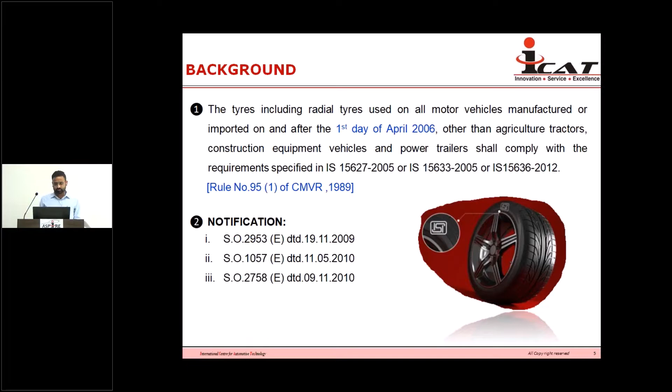Moving to the next screen, about AIS 142. This standard was finalized in 2019, and I was lucky enough to get an opportunity to work closely on formulation of the AIS 142 regulation with various stakeholders.

In this standard, we are covering three categories of tires, that is C1, C2, C3. I will discuss the definition of C1, C2, C3 in the next screen. This standard does not apply to two-wheeler tires.

In AIS 142, there are three test requirements to qualify the tire under this regulation. One is rolling sound emission test, rolling resistance test, and wet grip test. I have also mentioned the tires which are not covered under this regulation.

I would also like to highlight here, AIS 142 is also the base standard for testing, which will be used for the tire star labeling program, which is an upcoming regulation in India. As per our awareness, it is going to be notified in voluntary phase in the next 1 or 2 months.

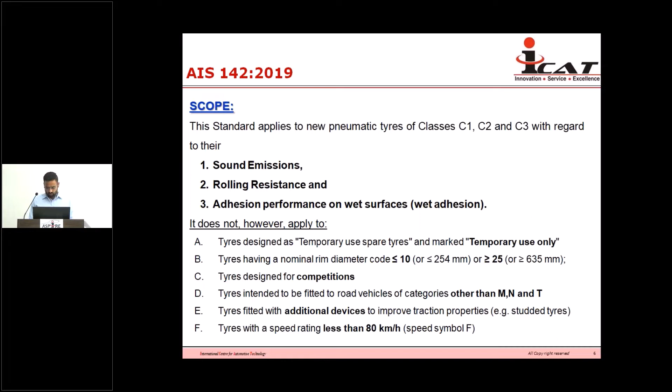Tire classes, just for information: C1 we call passenger car tires, and they conform to the whole requirement of IS 15633, or we can say ECR 30. C2 tires are single formation tires which conform to IS 15636, but load index should be 121 or less, and speed category should be more than N symbol, and should be marked with LT or C.

Moving to C3 category tire: single formation tire conforming to standard 15636, the tire should have load index marked more than 122, and tire shall not be marked with LT or C. In the second case, load index could be less than 121 and speed category less than or equal to M, and there should not be LT or C marking on the tire sidewall, so the tire will fall in C3 category.

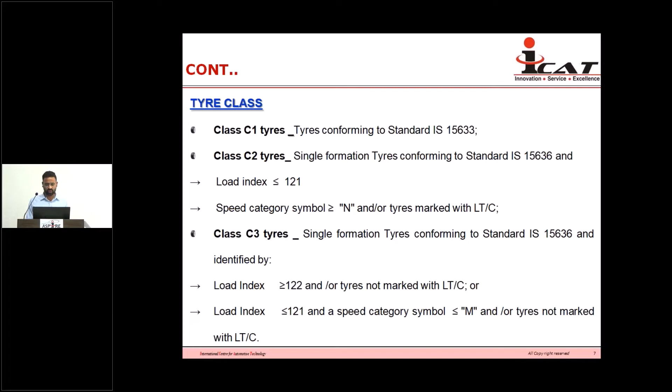Moving to next screen, this is the type approval procedure, clearly mentioned in AIS 142. I would also like to highlight that in AIS 142 there is a worst case criteria for type approval. As per my awareness, in ECR 117, since this standard is quite aligned with ECR 117, there is no worst case criteria for type approval.

For defining worst case criteria, if tires fall in the same range, what parameter must be common if we are going to define worst case criteria? Detail is already mentioned in AIS 142. I am just capturing brief points like manufacturer, category of use, and structure - this should not be changed, then you can apply worst case criteria.

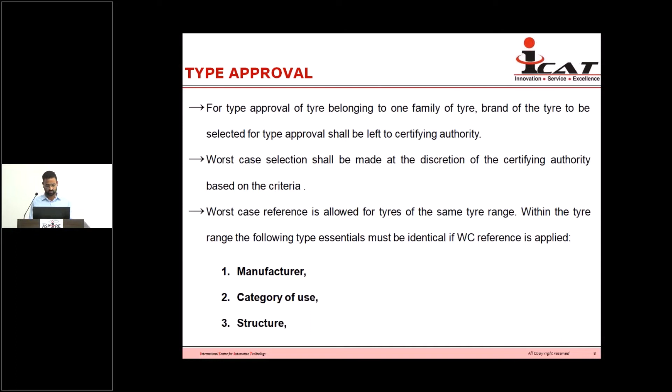Now, as I am presenting for indoor testing facility, rolling resistance is one of the most important tests for this standard. There are 4 kinds of methods for evaluation of rolling resistance from the tire. We have the torque method test facility to measure rolling resistance, and 2 separate machines to measure the whole range of tire CRR value - one for C1, C2, and the second for C3 category. These 2 facilities we have been running for the last 2 years.

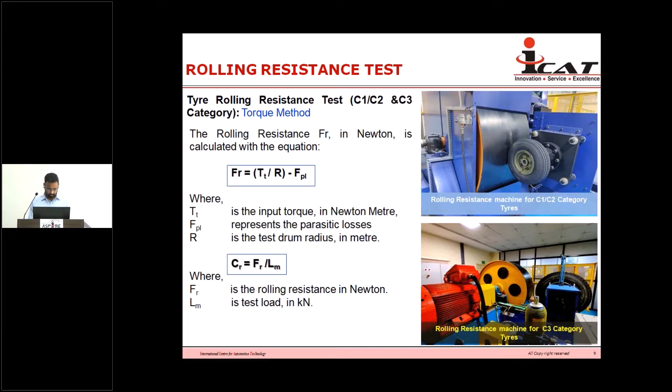Now moving to next slide, I am depicting here how we can define worst case criteria if load index is same for any tire. If tire is standard and reinforced but load index is same, then a standard tire will give the worst RRC value. So to qualify worst case criteria, you have to submit a standard tire if both tires have the same load index.

Same for run flat and standard tire - if tire is run flat and standard, then you have to give a run flat tire which has the same load index. Details are already mentioned in AIS 142.

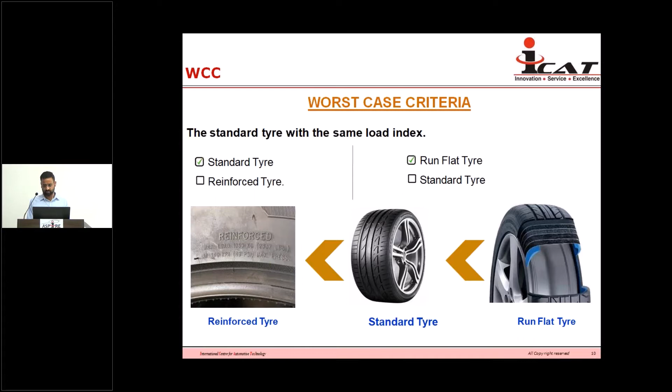Moving to next screen. In AIS 142, there are 3 stages of RRC values in order to qualify the test. One is stage 1, and there is one point I would like to highlight: in AIS 142 we are covering bias and radial both, while in other international standards bias is not covered, because in India we still have a good portion of tires that are bias. So we are also addressing bias tires, and also we have 12 inch tires - this is also taken care of in this standard.

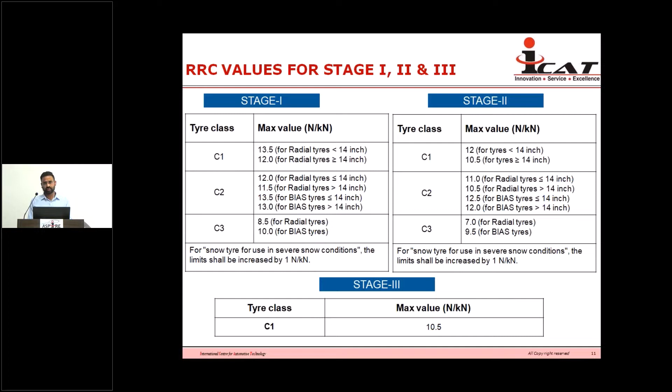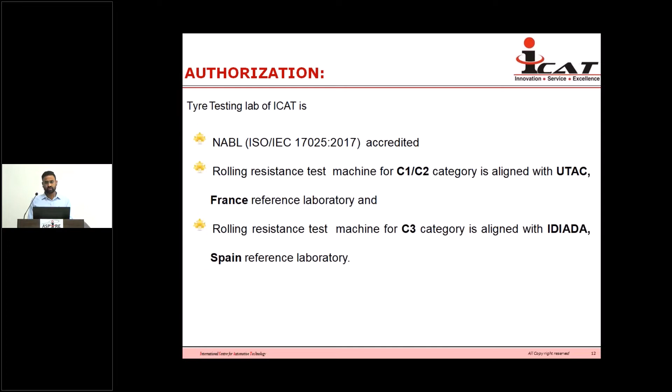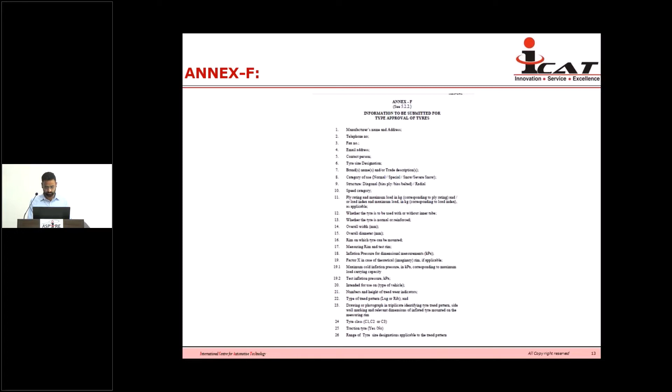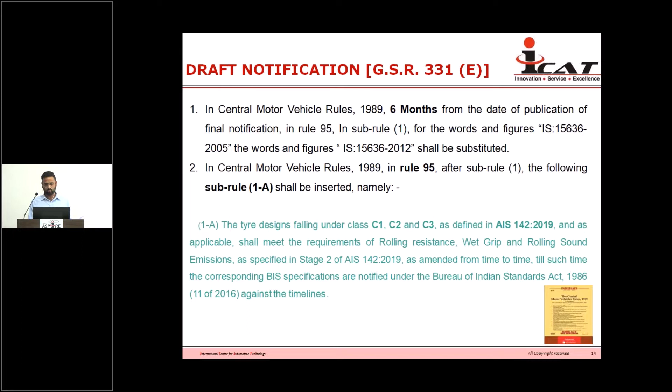So we are not going for stage 1, we are directly moving to stage 2, and any kind of comment on this regulation or draft notification - Ministry of Road Transport has already asked for comments from respective stakeholders. In case there is any big issue related to implementation or regulation, this will be implemented 6 months after this draft notification publication date. I would like to share the timelines proposed by the government for new tire designs - it would be applicable from October 2021, and for existing tire designs it would be applicable from 1st October 2022.

Regarding the new design of tire, we received many feedbacks from industry as well as technical experts. In our view, one of the most suited definitions could be—although the ministry has already asked for a suitable definition from stakeholders like test agencies, tire associations, and technical experts—that any tire produced after October 21 and eligible for BIS certification can be treated as a new design. However, the definition of new tire design is debatable and feedback is invited by the regulatory or notifying authority.

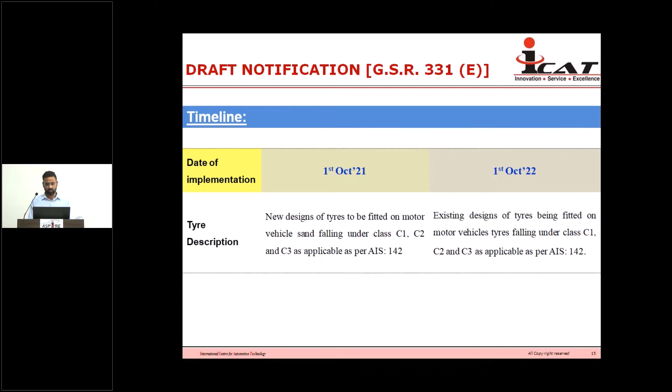So if from your side you have any views on new tire design, you can post them in the chat box. We will see, and if any further clarification is required, we will revert on that. So thank you, this is from my side.

Now over to Mr. Abhishek Kumar for wet grip and rolling sound emissions detail. Thank you.

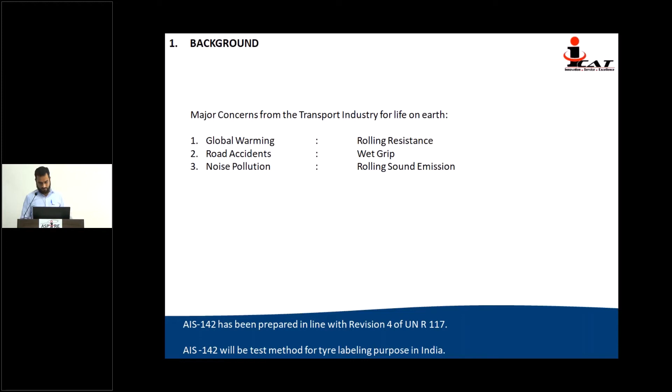The major concerns are global warming, which I already talked about, and road accidents. We have a decade of safety from 2011 to 2020, and again global targets for reduction in road accidents. Then noise pollution, which is important for our health. Now we will discuss these in detail.

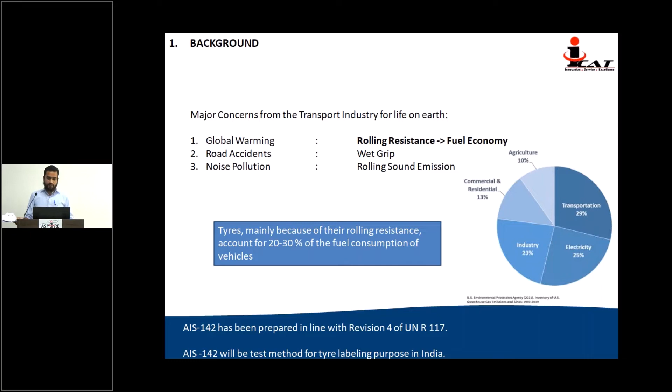Rolling resistance is directly linked to fuel economy, as Siddharth talked about. If you see this pie chart, transportation contributes to 29% of greenhouse gas emissions, and rolling resistance can play an important part in reducing these things, and hence global warming.

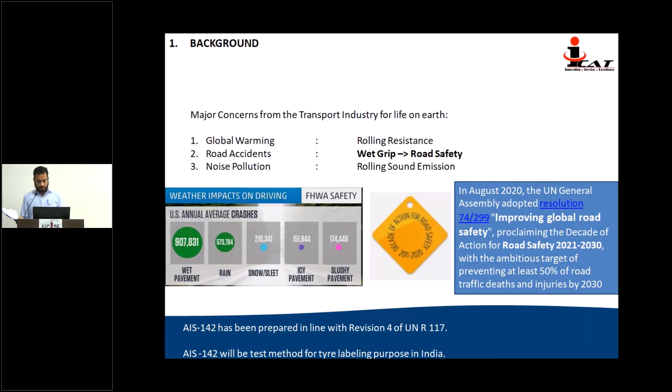This is US data. Unfortunately, we don't have much data in India.

Then rolling sound emission, which is the third part of this standard. Traffic noise, as you are all aware, is a nuisance. It affects our mental as well as physical health - blood pressure, sleep disturbances, behavior, immune system, aggression, etc. This sound emission comes from engine as well as tire and tailpipe emission, so in this standard we are targeting tire road noise.

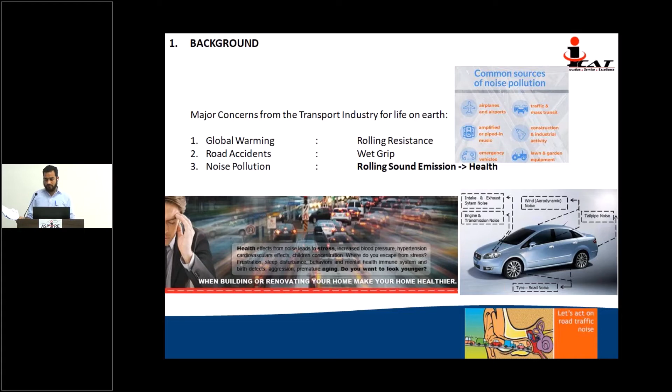So for improving all these things, there were labelings. The US adopted only UTQGS ratings, which you can see on the right side - tread wear, traction, temperature - written on most tires. Now Europe as well as India will in future have labels like this, which will cover rolling resistance, wet grip, and rolling sound emission. This is all for consumer awareness, so they purchase with an informed choice.

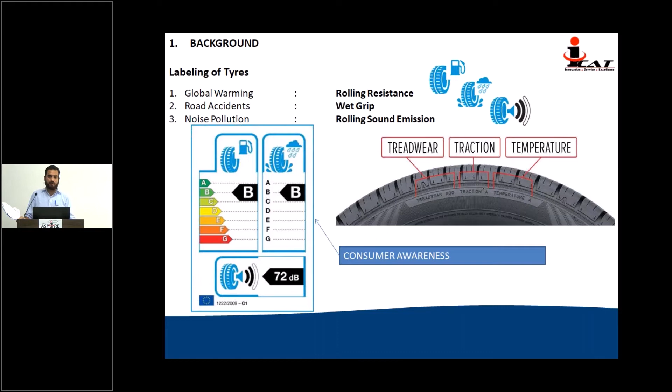As we talked about, these parameters are very much interlinked. Improving rolling resistance may affect wet grip. So the tire industry is doing its bit to bring tires which have reduced rolling resistance and improved wet braking. All these parameters have to live together and have a sound sleep, like you can see on this pillow.

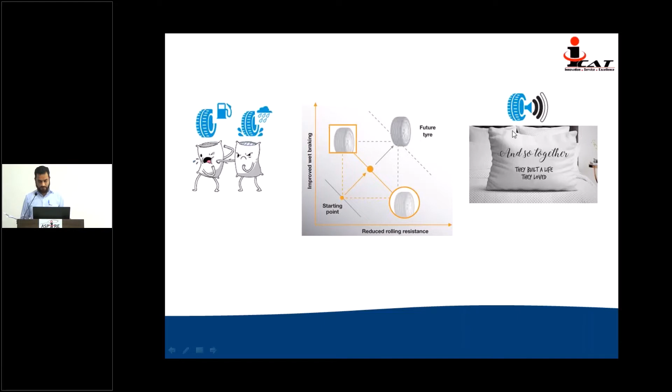Tire classification - broad tire classification has been told by Siddharth. So C1, C2, C3, and their respective European as well as Indian standards I have mentioned here. Now C3 tires are divided further into two more families, wide family and narrow family, depending upon their section width, with 285mm as the demarcation line.

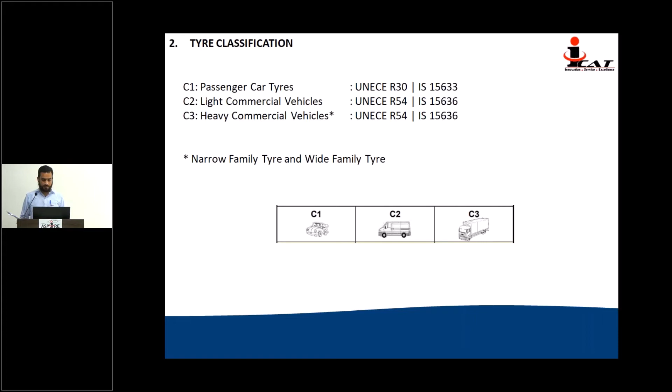Now wet grip testing - we will talk about what facilities and how we are doing it. This is the aerial overview of our ICAT track at Center 2, Manesar. We have an ABS track, and on the left of the ABS track, we have this track meant for wet grip testing.

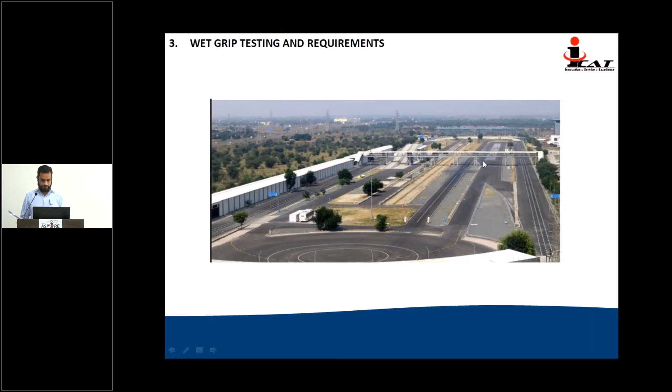Track requirements have a slight difference for C1 and C2, C3 tires, related to British pendulum number - 42 to 60 for C1, and 40 to 60 for C2, C3 tires. Or if measuring with the trailer method, which is PBFC, peak braking force coefficient, it is 0.7 plus or minus 0.1. Other criteria are gradient, maximum chipping size, and texture depth - I have mentioned all these. These are the track requirements on which wet grip testing is to be performed.

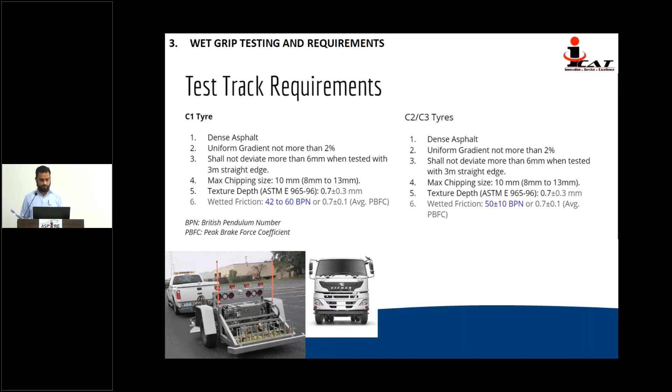Here we have standard reference test tires. Unlike rolling resistance, where the tire is put to test directly on the machine with some interlab correlations, here we have a standard reference test tire, and the candidate tire from companies is to be checked against it.

There are 4 types of standard reference test tires. We have 14-inch, which is used currently although it is not under production now - it was used for track certification. Then we have 16-inch tire, used for wet grip testing of C1 tires. Then 16C, for C2 tires. And then 19.5, for the narrow family of C3 tires, and 22.5-inch tire for the wider family of C3 tires.

These tires are kept in controlled conditions as mentioned in the standard. The sequence for testing is: first the SRTT is tested and its performance checked, then we check performance for the candidate tire, and then again come back to SRTT. In between we can test a maximum of 3 tires, and depending upon those we have different weightage formulas to calculate the wet grip index. Other important things for wet grip testing are tire conditioning, track conditioning, tire burnishing, and finally testing and the report.

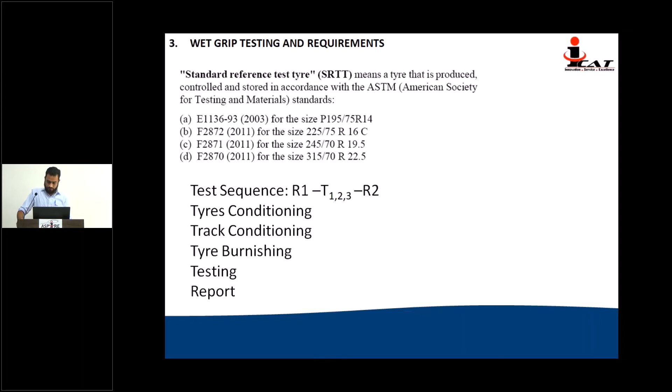Tire conditioning: tires have to be kept for 2 hours adjacent to the test track, such that it is stabilized at the ambient temperature of the test track area. This is a must requirement, although it has been found that it is still a very narrow approach for conditioning—minimum of 2 hours. So it is good to have tire conditioning done for maybe more than 2 hours.

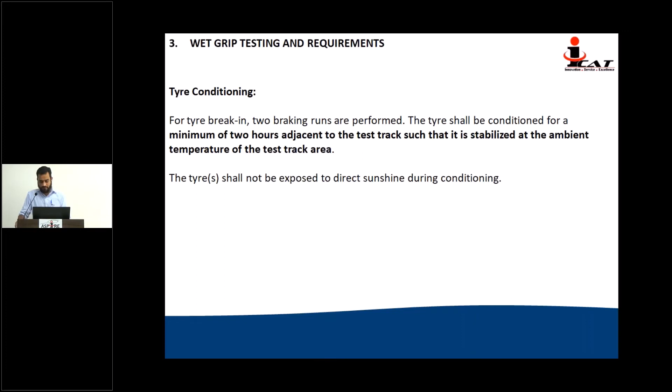This tire conditioning applies for wet grip testing in both methods, trailer and vehicle method, which I will talk about in subsequent slides. Track conditioning: vehicle method has a different way of track conditioning, and trailer method has a separate methodology for track conditioning.

For vehicle method, the track has to be watered half an hour prior to testing. If it is not done, you may expect a huge variation in test results, so this is a very important aspect of testing. Additionally, maintaining the water film thickness, which is 1.0 mm plus minus 0.5 mm from the peak of pavement. Then ultimately it has to be conditioned with a tire which is not meant for testing, at a speed of 90 km per hour.

This is for vehicle method C1 tire. For C2 tire in vehicle method, it is done at a speed of 50 km per hour. Now trailer method has again different speeds: for C1 tire it is 65 plus minus 2 km per hour, and for C2/C3 tire it is 50 km per hour, with the tire not involved in testing. So you have to change the tire on the vehicle or trailer after doing this track conditioning, and get back to testing within a given time frame.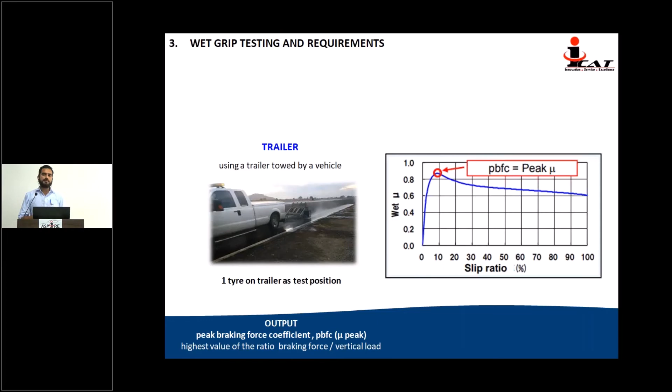So you have two methods to perform wet grip index testing as of now in Europe as well as in India. The trailer method is the peak braking coefficient measurement method: you lock one of the test position tires—there is one tire on the trailer as test position, on the left side of the trailer in this picture. This tire is braked while the whole system keeps moving at a certain speed, here 65 km per hour with some tolerances, and we record continuous data of load and traction. As per standard, this data is generated, and with some averaging techniques, we get the peak mu value. The ratio of this peak mu for reference tire and candidate tire is basically the wet grip index, with some temperature corrections for C1 tires, but not for C2/C3 tires.

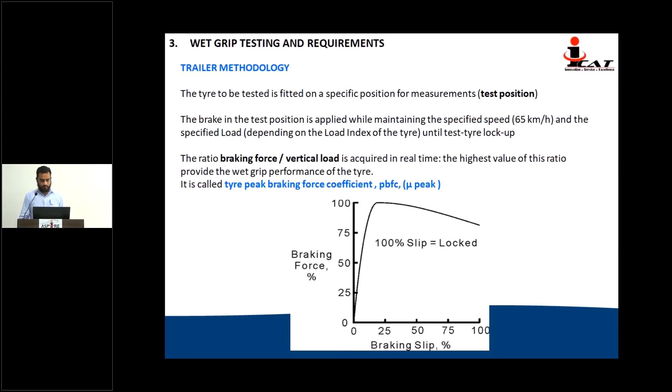Vehicle method is the same as I have already talked about. In this, you measure average deceleration, the distance covered by the vehicle from a certain speed to a certain speed—80 to 20 in this case—and measuring average deceleration, dividing it by G, you get a brake force coefficient, and the ratio of these is wet grip index.

These methods, if you look at them, seem simple, but when testing from a 12-inch tire to a 22.5-inch tire, or maybe more in the future, there are many challenges thrown at us. As it is said, the devil is in the details.

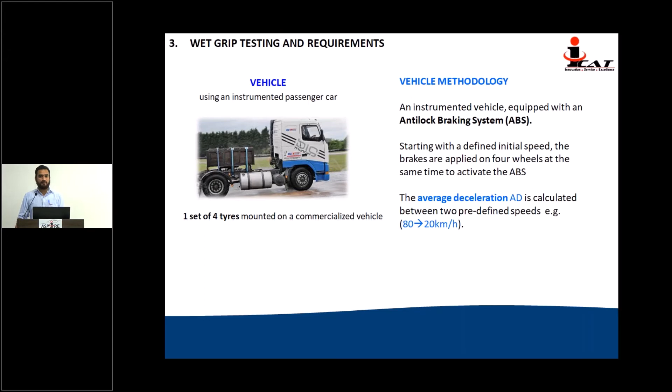There is also a bridge method for the vehicle method of wet grip testing, used when a vehicle is not suitable because the two tires to be tested—SRTT and candidate—are of very different sizes. Suppose a 12-inch tire is the candidate tire, and the SRTT is 16-inch; it is very difficult to test with the vehicle method, so it is usually tested with the trailer method. In the vehicle method, you have to use a control vehicle and a control tire to conduct this test, which is the bridge method.

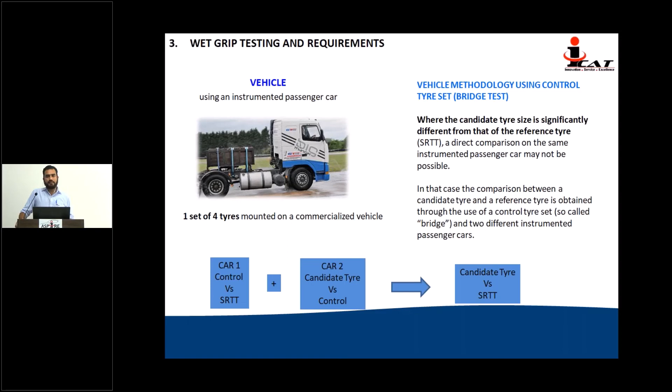Unfortunately, recently this test is under scrutiny and question because it induces a lot of variation in test results. In the latest developments in the European Union, there is a group WG21. They state that this should be avoided, and extreme tire sizes are to be tested on trailer.

This is some calculation using the trailer method and vehicle method. In the trailer method, mu is force by your load, and you get the value of PBC. Similarly, BFC, braking force coefficient, is obtained by your vehicle method. So it is simple, nothing much to talk about on this.

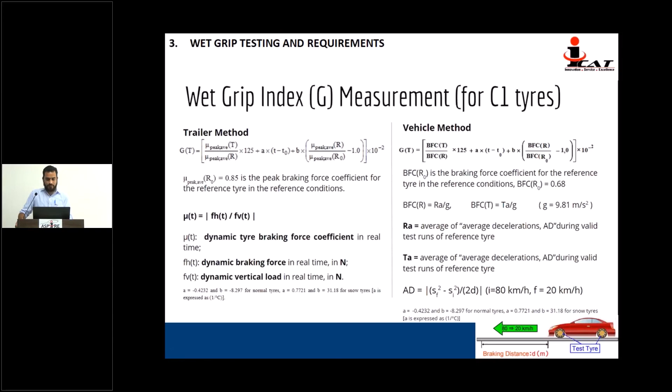This is for C1 tire and for C2, C3 tire. An important difference here is that for C1 tire there is a temperature correction present in both cases, but in C2, C3 tire there is no temperature correction.

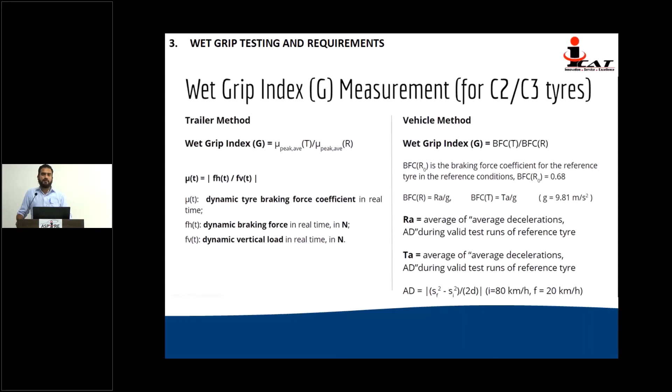Additionally, I forgot to mention a few other points. The typology of tires varies very much, from M+S tire to snow tire, all weather tire, severe snow tire, and professional tire, as well as bias ply tire. All these have a different set of performance under these test conditions. So some studies are going on to minimize this variation and get a value which is uniform throughout different testing agencies or partners where tests are conducted.

As per their statement, when wet grip index was first developed as a trailer and vehicle test method, there was good repeatability, but under the same test conditions. However, with time and different typology of tire, this has changed, and reproducibility of wet grip index has not been achieved as wanted.

In other words, this happens when there is a different set of testing conditions within the allowed range. For example, right now it is 5 degrees Celsius to 35 degrees Celsius, so there is a wide range of testing conditions. Similarly, for track there is a wide range of track certification, from 0.6 PBC to 0.8 PBC value, and with the British pendulum tester, there is a range from 40 to 60. So there is a huge variation in the parameters which influence the index value, and this brings issues of reproducibility in the test results.

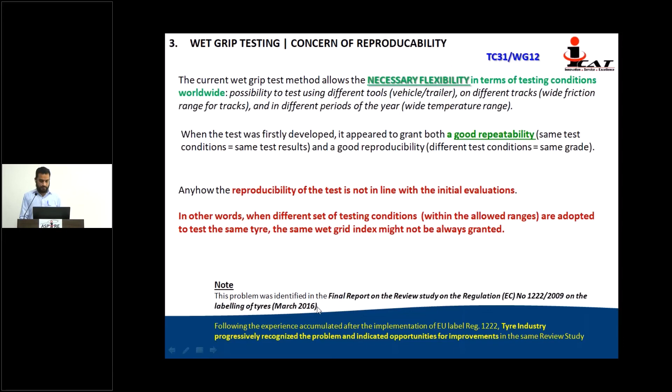So what was found? This is some additional information I'm sharing with you. The main sources of variability of the test method are listed here: these are methodology, trailer and vehicle, which give different test results, and then conditioning of the tire, which is also a major concern.

Wet track, track friction property and temperature are also variables, and tire typology and the corresponding correction equation is also a concern. Right now there is only one formula for correction covering all types of tires.

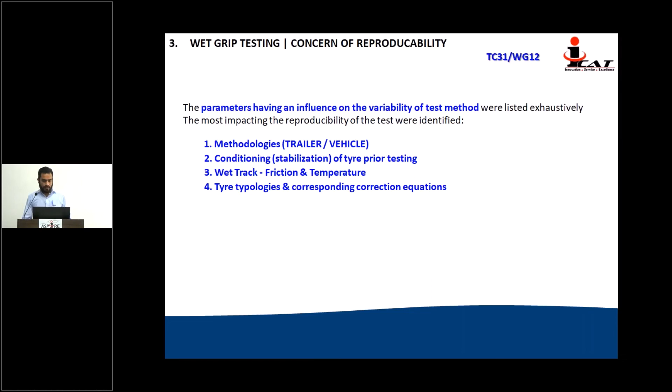Here they have given this example: there is a summer tire, all season tire, a 3PMSF tire, and winter tire. They are all used in different conditions in different parts of the world, so each tire behaves differently, or is designed to behave differently, under different test conditions. Equations need to be found through exhaustive and extensive testing to bring all these under the same frame and similar results.

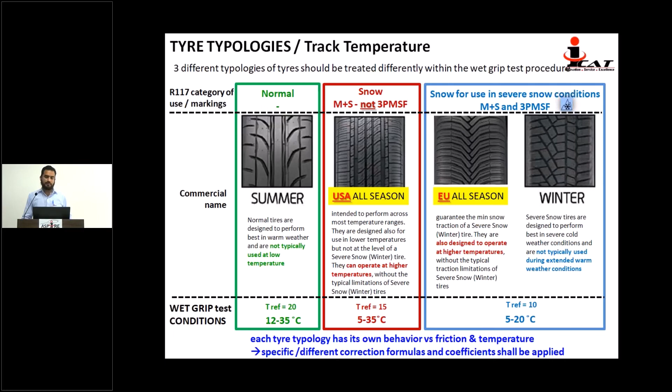So this was all about the rolling wet grip index. This is rolling sound emission. Rolling sound emission is not very different from the pass by noise test which vehicle manufacturers perform.

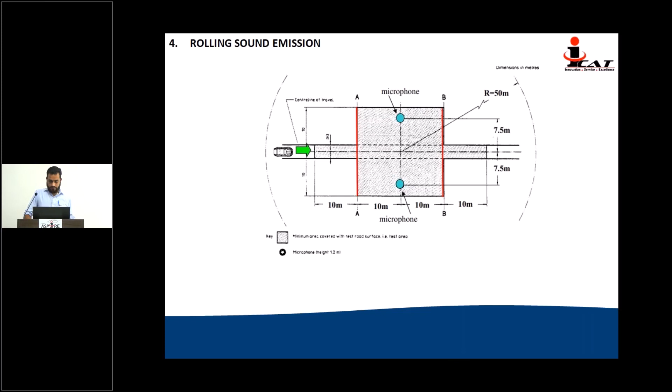This is the track for the rolling sound emission test, which is the same as the ISO 10844:2014 requirement. This is required by AIS 142 as well as AIS 117. Here, track was a source of variation; now the track approval process has become much more stringent, and there are certain conditions which must be met for the track.

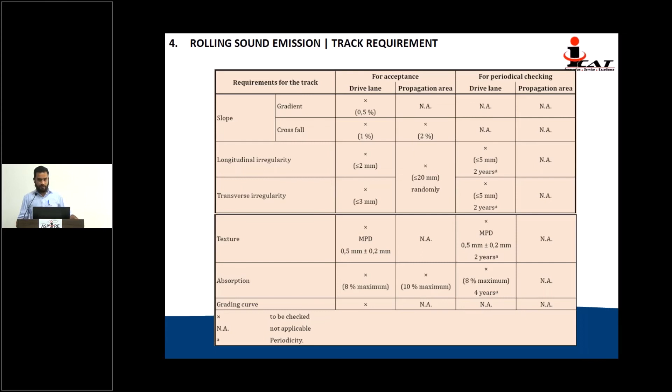These conditions include slopes, gradient and crossfall, irregularities both longitudinal and transverse, texture and absorption. While laying the track, the grading curve is of utmost importance, as listed here last. Once you have this track available, already in place and approved, you can perform the rolling sound emission test. There are certain requirements which I will list, starting with reference speed.

Reference speed: all tires are measured for rolling sound emission with respect to the reference speed. For C1 and C2 tire, it is 80 km per hour. For C3 tire, it is 70 km per hour.

Excuse me. Okay, so 80 km per hour. How do we arrive at this speed, this value? Can I have a pointer device or some writing device?

So 80 km per hour is the reference speed for C1 tire. It has to be tested for 8 readings, equally distributed between 70 to 90 - so 4 different speeds from 70 to 80, and 4 different speeds from 80 to 90.

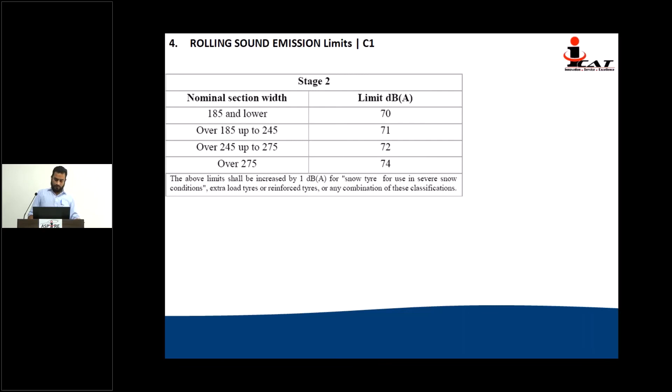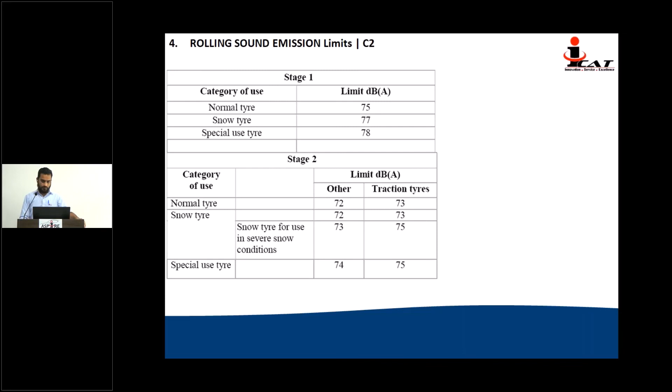For a C2 tire, it is a bit higher because a lot of improvement is required - the C2 tires are much wider, and the focus was more on load carrying capacity. But now this also has to be tamed. So now these are 75 to 78 in stage 1, and for stage 2 it is 73 to 75 or 72 to 74 - two different limits for traction tire or normal tire. For C3 tire, traction tire it is 75 to 77 and 73 to 75.

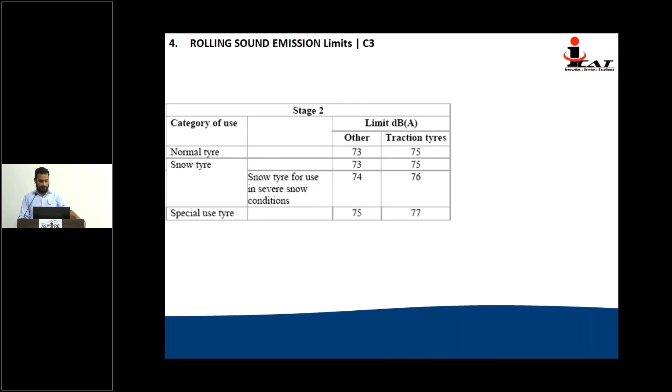Here in India, I don't think we have severe snow tires in the market, except for military use or somewhere else.

One thing I didn't mention - there is always a family of tires, and each family has a certain number of tires in it, and for each testing there is a different criteria. For RR it is different, for noise it is different, for wet grip it is different.

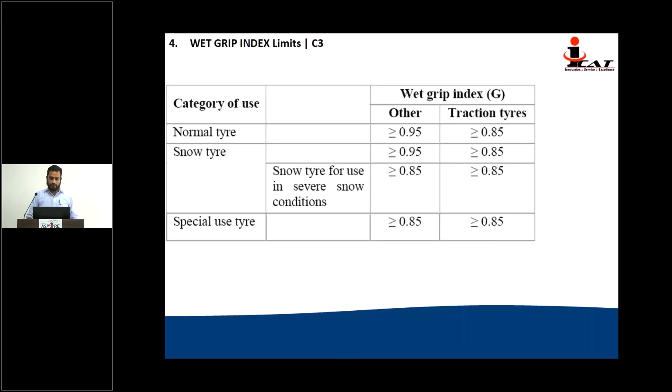For traction tires it is 0.85, and for normal tire it is 0.95. Then for C3 tire it is 0.65 - quite a low value right now. So these are the limits.

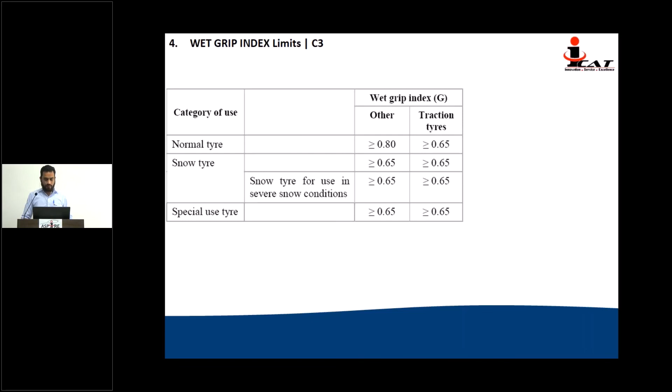Additionally, the wet grip index limits are going to increase in future. Some updates from Europe - for example, for C1 tire, it will be around 1.4 for stage 4. So it is an uphill task for everyone, and I hope we will perform tests for you.

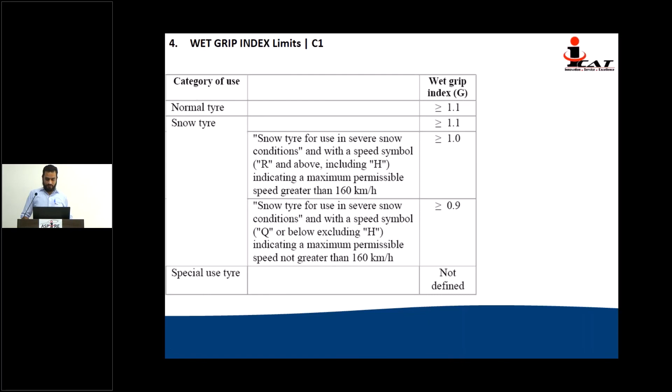And you will produce good tires with respect to RR, wet grip, and rolling noise. I close my presentation here. Thank you for having patience and having me here.